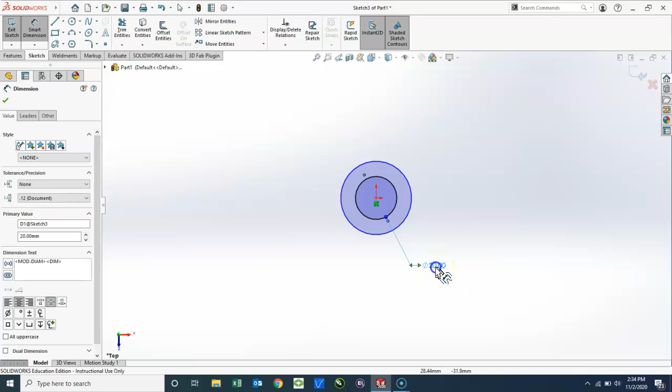To start our ring, I'm going to use the top plane. And in the top plane, I'm going to draw two circles. And I'm going to dimension the inner circle to whatever size diameter my finger is, or the finger that I'm going to put the ring on. Now, during class, you will have a ring sizing gauge to check your actual finger. So you'll be able to get an exact amount of distance here for the inside of the ring.

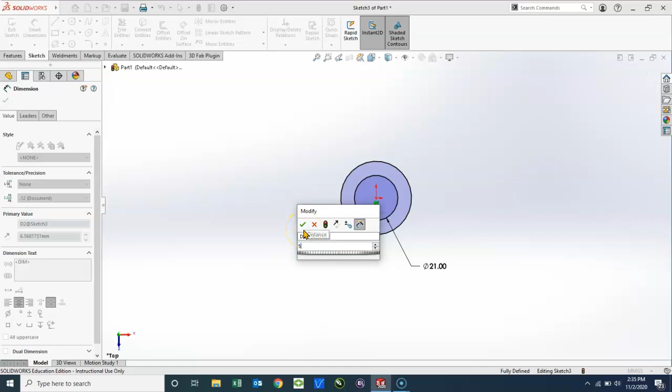So this 21 is going to vary. It is not going to be 21. You're going to measure your own finger, and that number will probably be different than mine. Okay. The outside diameter, I'm not going to use an outside diameter. I'm going to click on both circles so that I can get a dimension like this, which is going to basically tell us how thick the ring will be. And so I have this set to 5 millimeters. I think that's probably a little thick. I'm going to change that to 3.5.

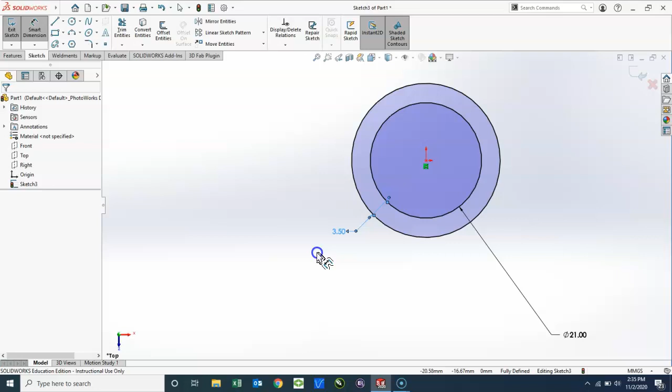So you have to think about during this project, how big, how thick. The dimensioning is really important for this ring, because you want to think about how it's going to feel on your finger in addition to what it looks like. So dimensioning and using calipers and rulers to measure is extremely important.

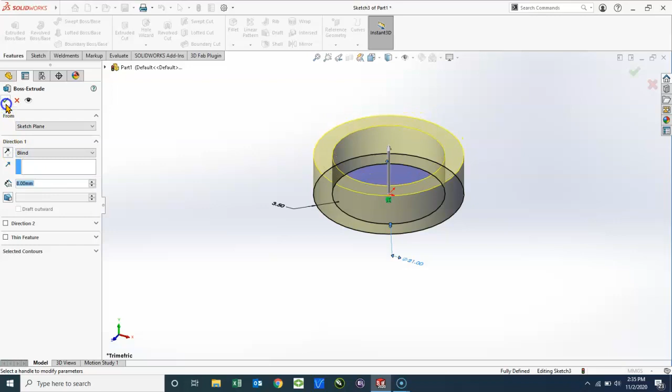So once those two dimensions have been set, we can now extrude the circles. And again, you have to think about, okay, how thick do I want this to be? I'm going to make this about 8 millimeters and click OK. Now you can always go back and you can adjust the dimensions of your sketch and of the extrusion right here anytime you want before you print it.

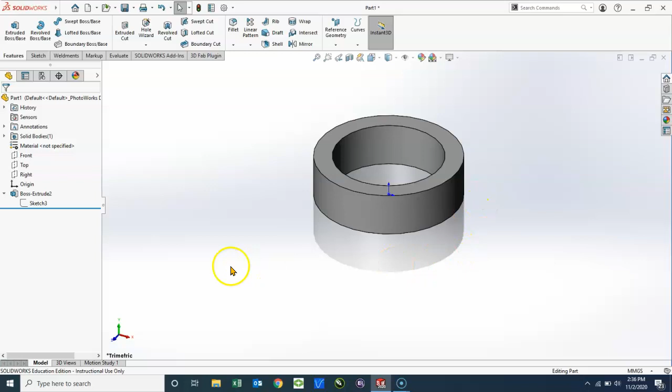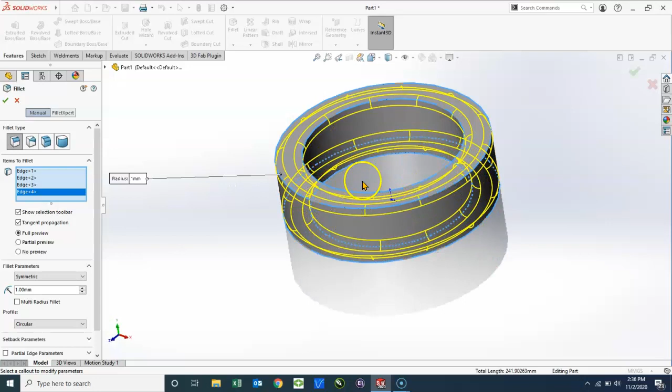Now, to customize this, there's a couple things. First of all, we have 90-degree corners right here. They're sharper edges. Okay? If you're not familiar with rings and putting them on and off your finger, you don't want sharp edges. One, they can dig into your skin, and two, rounding them can help the ring come on and off easier. And so I'm going to add a fillet to the corner. Now yours might default to 10 millimeters, so you may need to change the radius of the fillet, but I'm going to put a 1 millimeter fillet on each edge so that my ring starts to look like this.

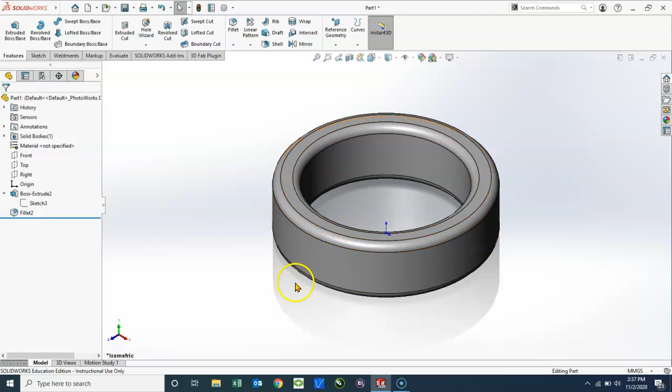Okay. Now you may also want to customize what's on this surface all the way around. And so I'm going to take you through a new concept called a wrap. It is on the features toolbar, wrap, right here. But first what we're going to do is we're going to create a new plane. So right now, here's our origin. So our default planes run right through the middle or very close to our object. Okay, so what we want is a plane that is out here. And so I'm going to use my front plane. I'm going to highlight it.

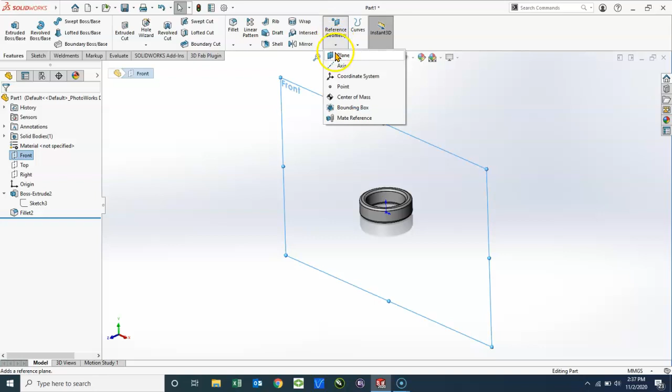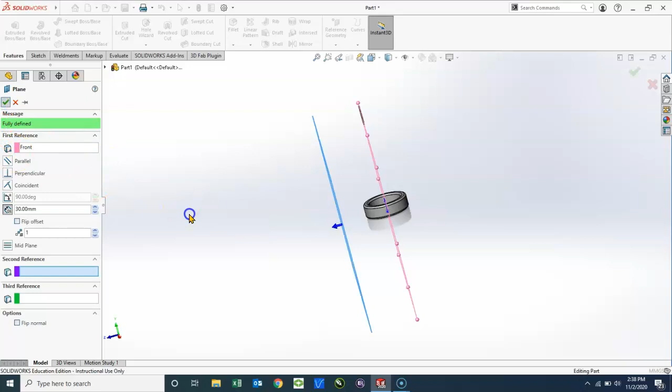I'm going to go to Reference Geometry, Plane. And it gives me a preview. So basically I'm creating a new plane a specific distance, it defaults to 10 millimeters, away from the original front plane here. So I'm going to make it about 30, as long as it's outside of the ring. I'm going to click OK. So there's our new plane, plane 1. Notice it shows up in our design tree. If you don't want to see it, you can always turn it off with the hide feature right here. Or if you want to see it, you can turn it back on.

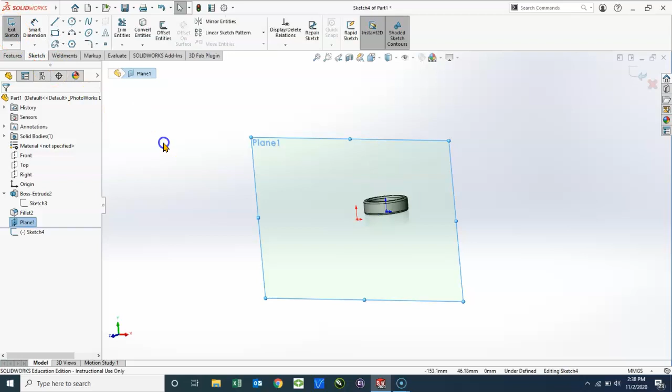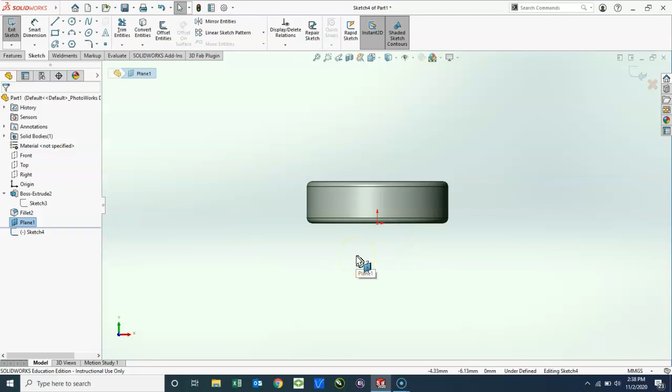So on that plane, I'm going to start a sketch. And I'm going to look at it normal to, because I do want to make sure that whatever I'm going to emboss onto or cut into my ring, I'm looking at it straight and it's going to fit directly on the ring. So there are a couple options here. You could design a pattern to put on the ring, or you could design text, and we're going to go over both today. So first of all, let's say maybe you want to do a pattern.

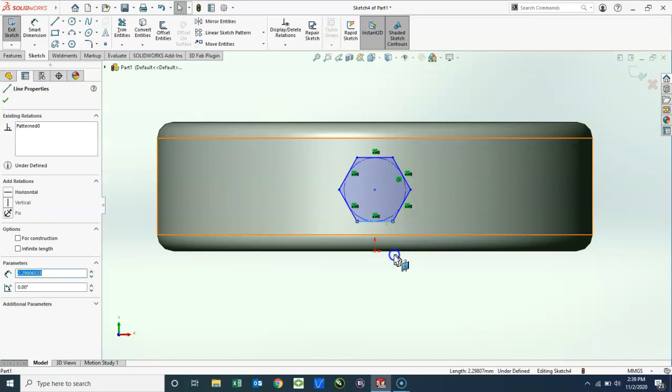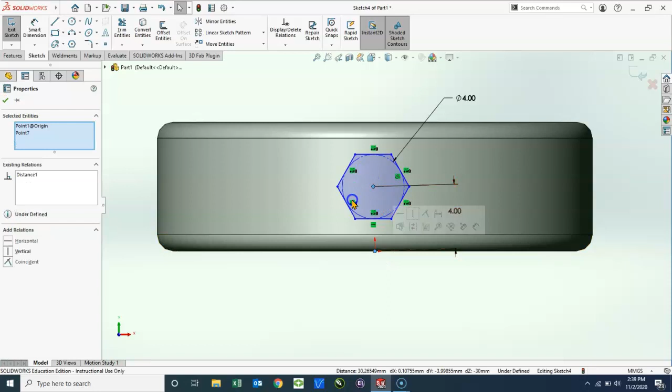And so I'm going to use my polygon tool, and I'm going to draw a polygon, a hexagon, and in good practice, I'm going to add some relations and dimensions to this so that it's fully defined. And one last relation, I'm going to assign a vertical relationship between the center point of that inscribed circle and the origin. And so now that is fully defined. I'm going to make this a hair bigger. There we go. Good. And I'm going to exit the sketch.

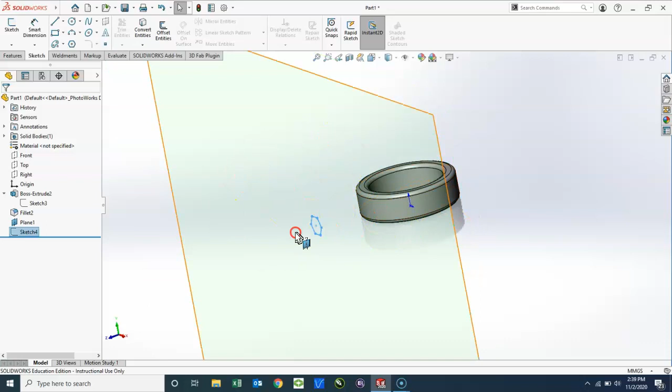So as we see this, our sketch is on that plane. It is not touching our object, but we are going to what's called wrap this onto our object. And so I'm going to go to Features, Wrap, and I need to choose a sketch. So it's asking here for a plane or a sketch. So I'm going to choose our sketch.

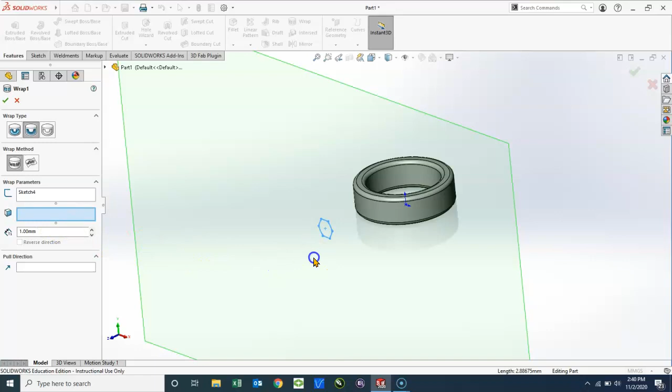And so it highlights here in wrap parameters. Now this blue box right here, this is the face for wrap sketch. This is what you want to project this onto, and so that would be this surface here. And so notice it projects that onto that object. It's going to cut in 1 millimeter. Now you can adjust that. I'm going to leave it at 1, and I'm going to click OK.

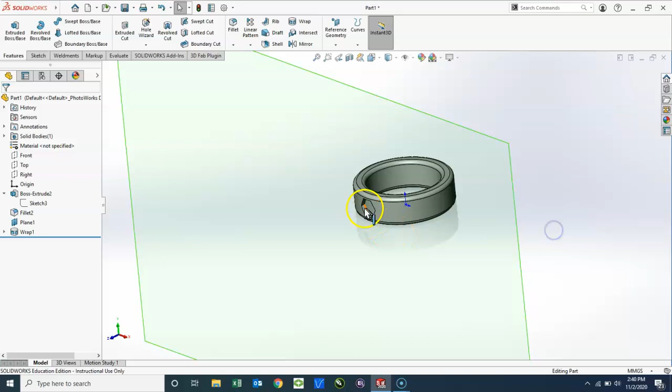So now I have that shape engraved, cut into our ring. Now maybe I want that to be a pattern all the way around. Okay, so this is another new feature that we're going to talk about, and that is circular pattern. So on the Features toolbar, under Linear Pattern, the flyout menu, Circular Pattern.

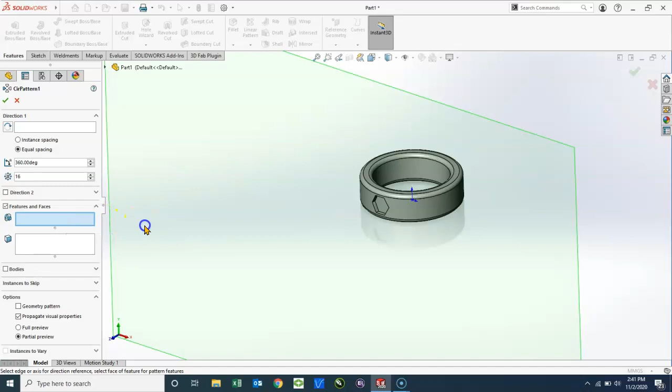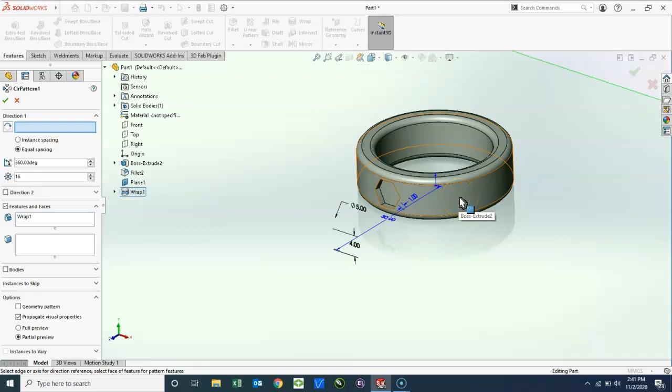So the first thing it's asking right here is the features and face. So what do we want to pattern? So there's two ways that we can select that. We could open up our design tree in the display area and choose the wrap, or we can click on the surface in there. Okay, notice it says wrap right here. And then lastly, right here at the very top under direction 1, it's asking for the pattern axis. We can actually just click on this surface and it will pattern that around.

So this is set to 16. Yours might default to 4 or 6. And so you can see how this will work. I'm going to leave it at 16 and click OK. I'm going to hide my plane. I don't need to see it. So here is a pattern of a ring. Okay.

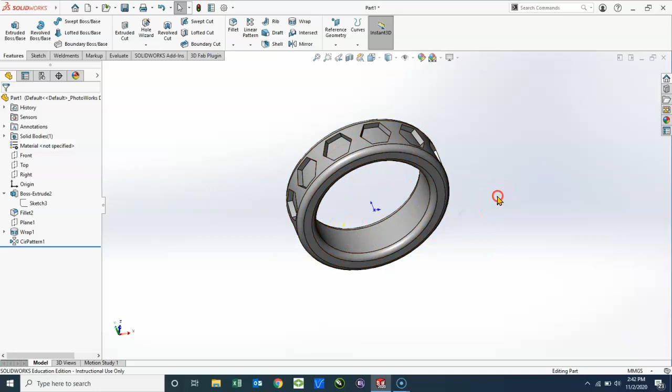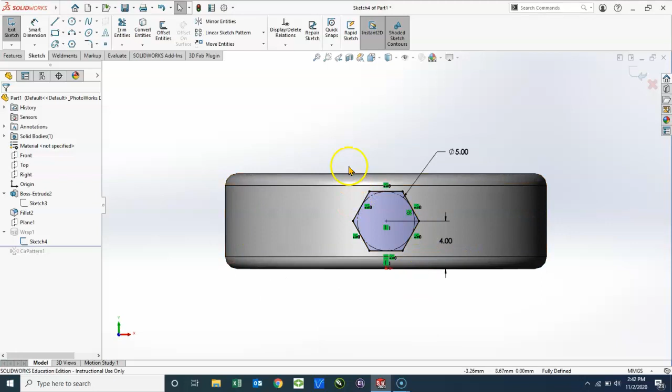Now let's say maybe you wanted to put some text on here instead of a symbol. So I'm going to go ahead and I'm going to delete. Actually, what I'll do is I'll roll this back to my wrap. So in my wrap, instead of this shape, I can delete that and I can use my text tool. So on my sketch toolbar, you notice there is a text icon.

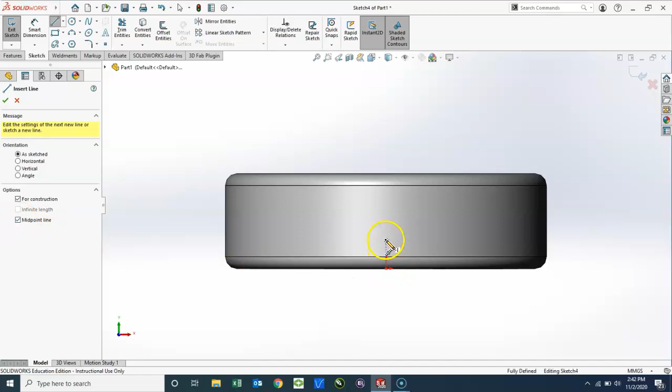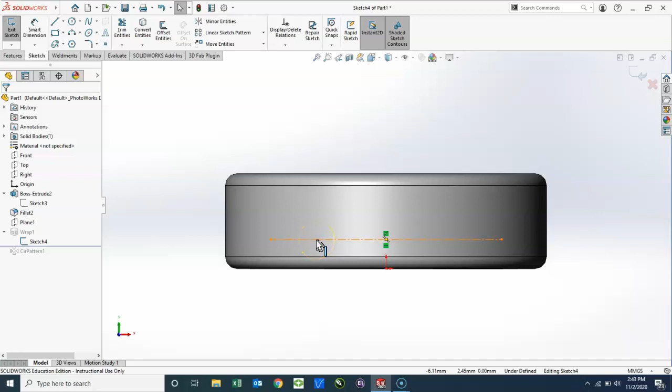Before you do that, what I always suggest is using a center line. And I'm going to do a midpoint line. I'm going to click right here and I'm going to stretch this across. And you can think of the text will be on this line. So you could think of this as a line on a piece of paper, and so you're writing a word and you're staying on the line. It does need to be a center line. If it is an object line, your cut into the material will not work. So this does need to be a center line.

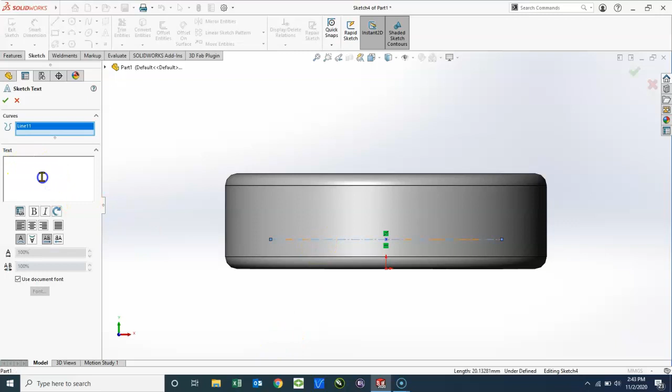So now I can go to my text tool and it's asking for the curve. And the curve in this case is the center line. The text, you type that here. Now you can center it, so it's now centered on the line. You can bold it. I think you do have to have that highlighted. There's bold. You can flip it. You can do a lot of things here.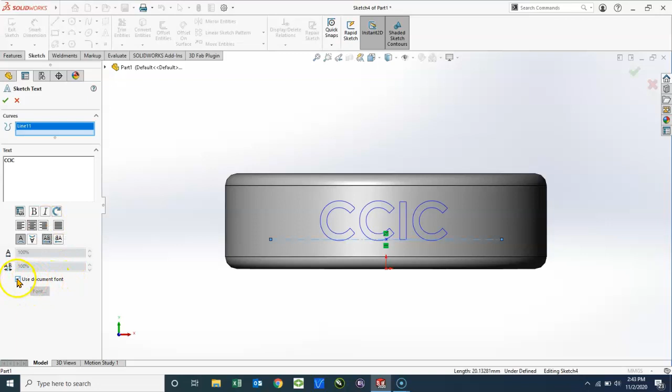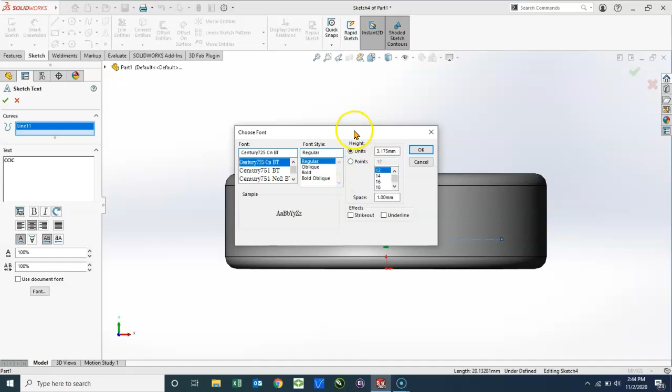Now, if you want a different font, you can uncheck the use document font button and then click on font, and you can pick a different font. One thing you need to be careful of is fonts that are very stylish and creative, fancy, if you will, like let's say Chiller. This may not cut because of, well, that one might because it does have closed contours. Let me find another one. I want to give you a good example of something not to choose. Blocky text works the best. Yes, even Comic Sans works nicely.

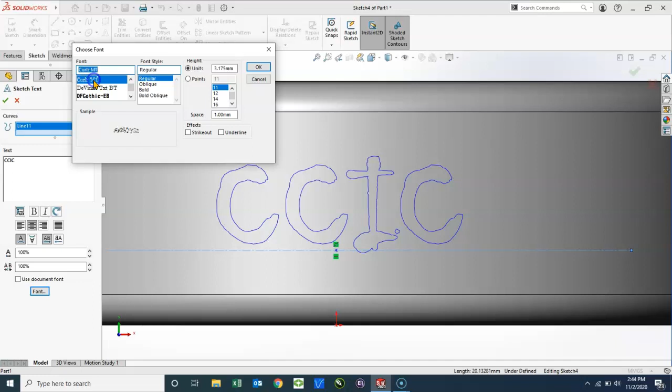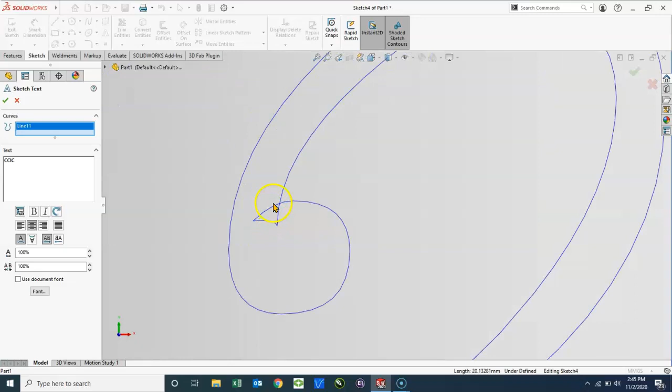Okay, here's a good example. Notice how this is very stylish and creative, but notice right here the font intersects itself. So if you were to try to wrap or cut with this font, it will not work because it's intersecting itself. Notice right here as well. Okay, it forms a loop. That's bad. That's not going to cut. Okay, so you want to use more of a block type of font. This would work just fine. And once you have that set up, you can hit OK and exit the sketch.

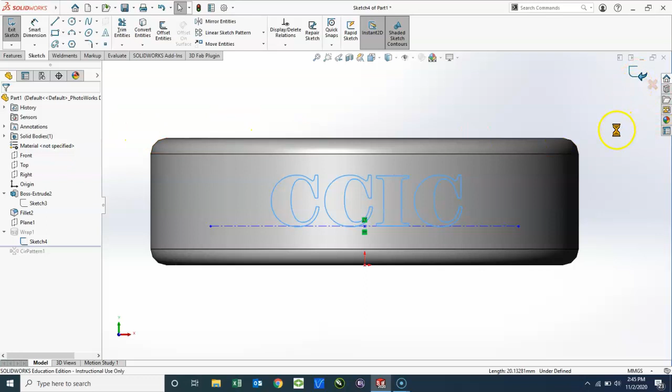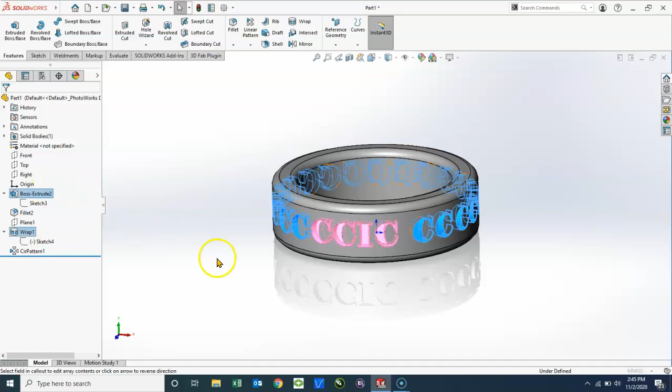Now, since I already did the wrap, you can see that it has been embossed in there. Now, if I were to roll this down and activate the circular pattern, it may or may not work. Oh, it did work. What do you know? But that's pretty crazy. So let's go back in and check it. Yeah, I don't think we want 12 of those. Maybe we want, let's say 5. So now you have yourself there a CCIC ring.

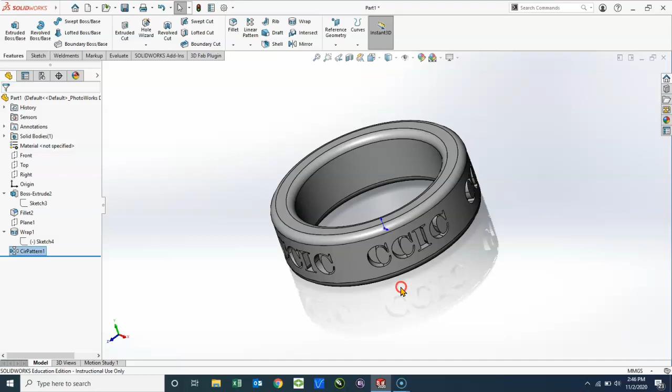Okay. The ring, when it's done, will be gray, much like what you see here. You can paint it, but the color choice is gray coming out of the printer. But this would then be ready; you would save this as an STL file, and you would then import this into Preform.